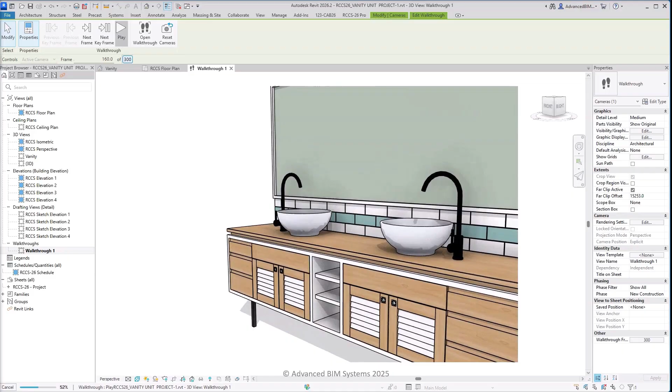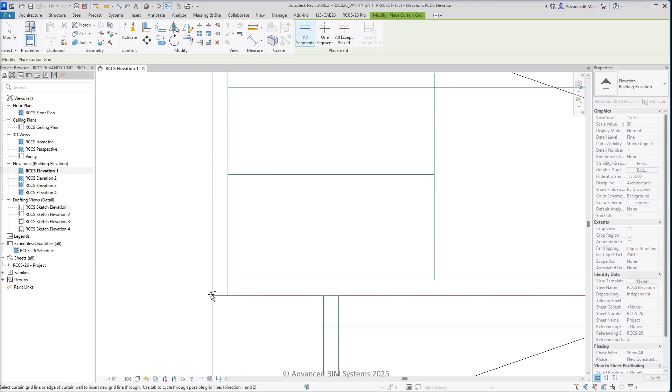To begin this vanity project, use the Split tool to horizontally split the RCCS host wall into 3 separate walls. Hide the middle host wall, which will later contain wall tiles. And then begin adding grids to the lower host wall. When adding grids, always add the longest, continuous, edge-to-edge grids first, followed by the smaller segmented grids that trim in between.

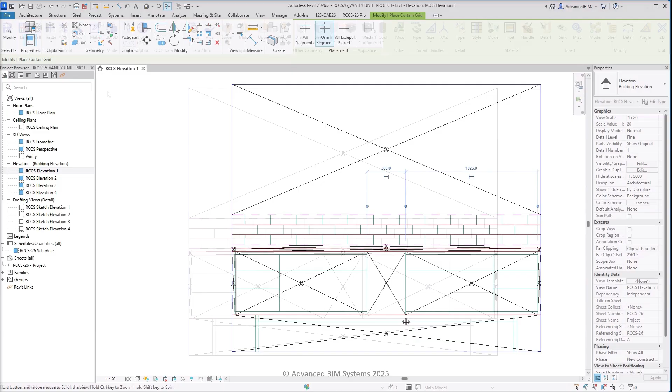It may be necessary at times to place a grid away from its 2D reference line, and then use the Align tool to correctly locate the grid. For grids that can host multiple grid segments, use the Add Remove Segments function to insert additional grid segments where required.

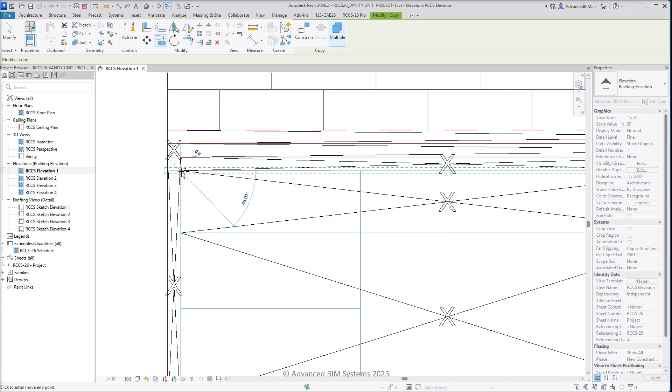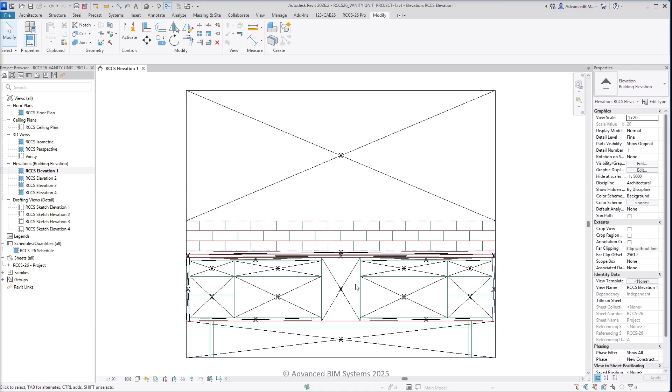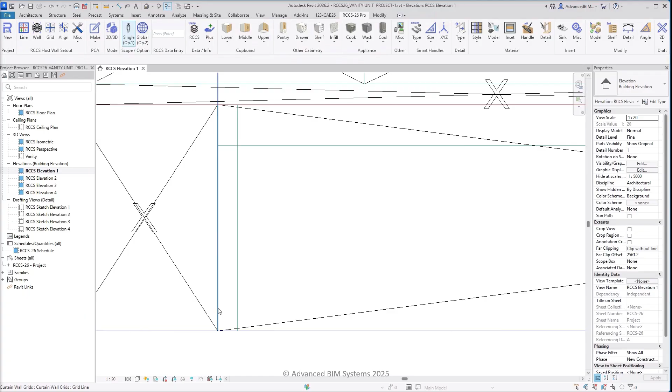It's always far easier and faster to copy grids that have the same grid segments, rather than starting each grid from scratch. The final grids in the lower host wall will determine the size and location of the legs and supports for this vanity unit.

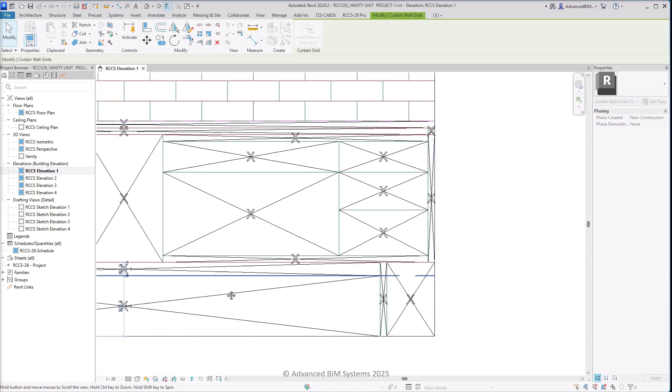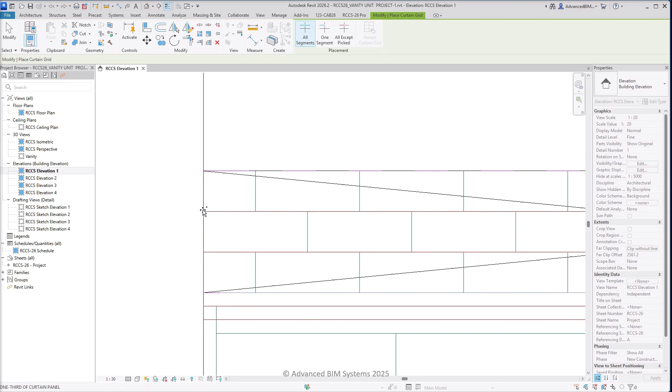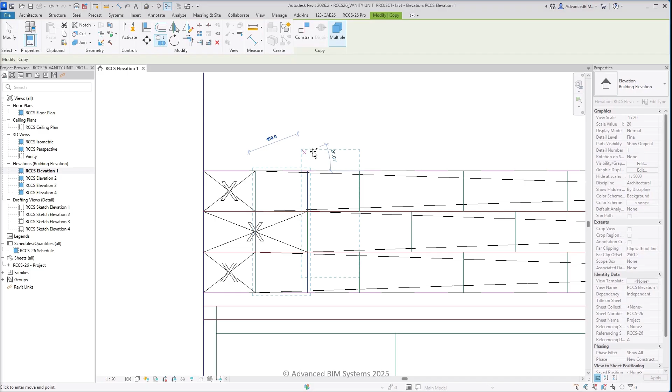Toggle the Reveal Hidden Elements mode, then unhide the middle host wall section to begin adding the wall tile grids. Hiding the upper and lower host walls makes it far easier to add the grids for the wall tiles. Once again, it's far easier to copy multiple grids across the design than it is to create each grid separately.

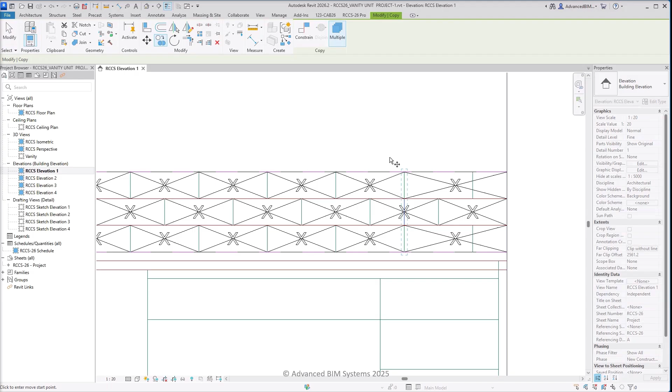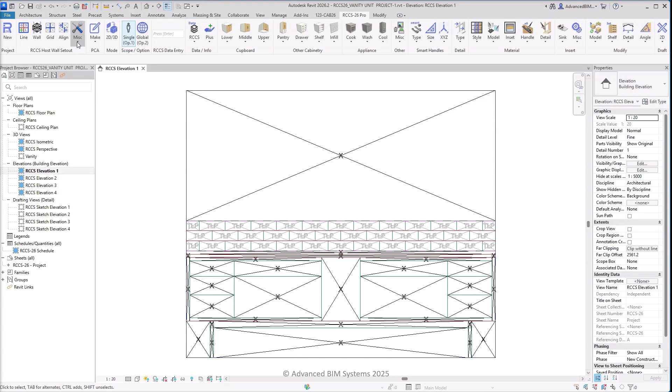To assign wall tiles, enter a tile thickness, then activate the Populate function, which will automatically assign tiles to all visible cells in this view. Now, unhide the upper and lower host walls to begin assigning the various cabinetry components to this design. Start by adding the various voids throughout the lower host wall. Enter a depth value. Then assign the infill panel components where required.

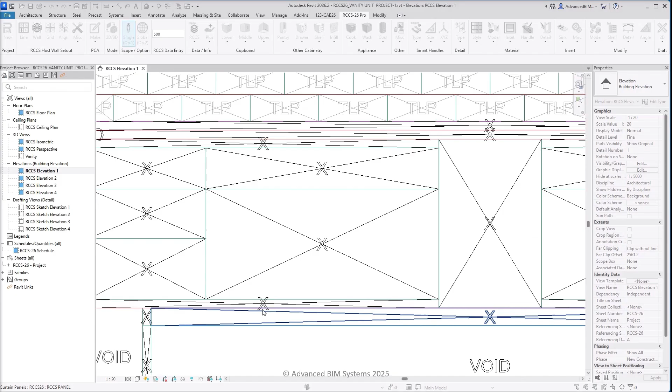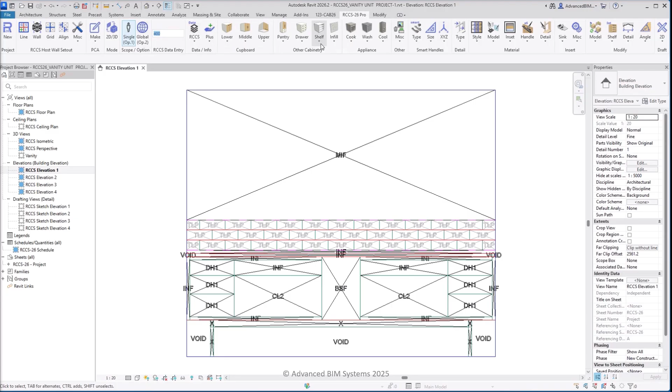Change the depth value, then activate the drawer function, and click on the required cells to assign drawer components. Assign the remaining components that have the same depth value. Then reset the depth value and assign the upper mirror. Use the single and double space frame component functions to create the vanity legs and support frame.

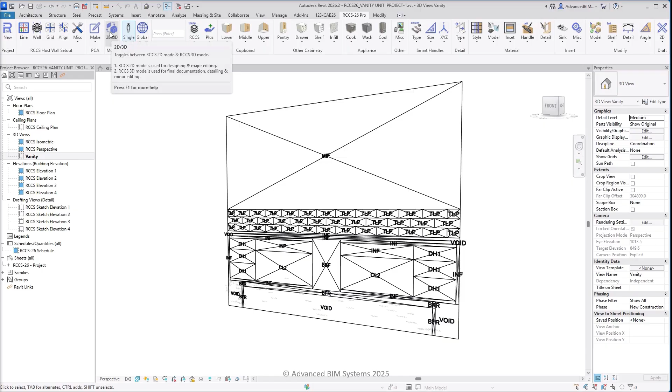To generate the vanity model, switch to a 3D view, then activate 3D mode by pressing the mode toggle button. The wood H material style will automatically change all relevant components to horizontal wood grain. Activate the Finish 1 model material and assign this material to the required components.

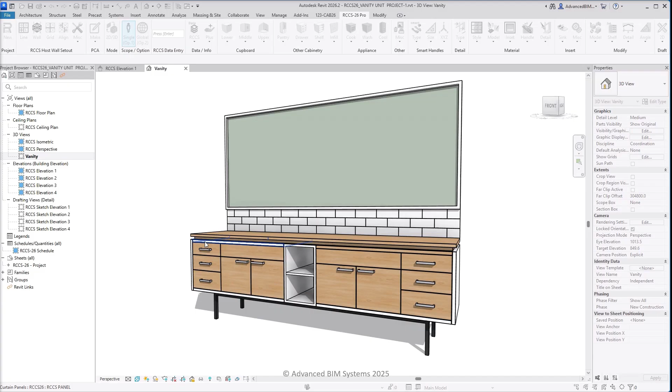Activate the Shelf Increase function, then click on the box Shelf component once to increase the shelf count by 1. Use the Base Offset function to increase the height of the bottom shelf while still maintaining equal spacing between the upper shelves. The Width function can be used to change the shelf frame width.

The Shelf Setback function offsets the front face of the inner shelves from the front face of the main component. Finally, adjust the inner shelf thickness using the Thickness function. Setting the outer edge radius to 0 will create a seamless transition between adjacent components. The next step is to assign HQ handles 1 and 2 to the drawers and cabinets as required.

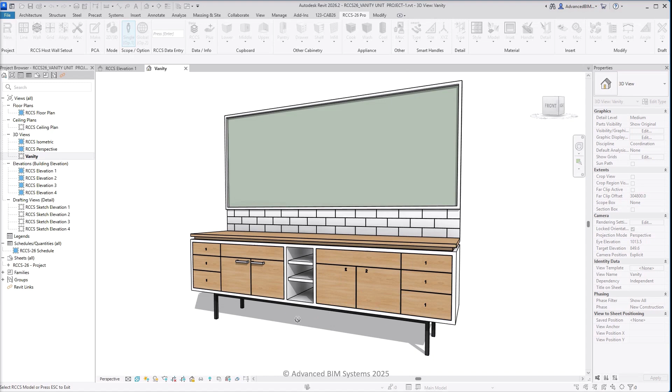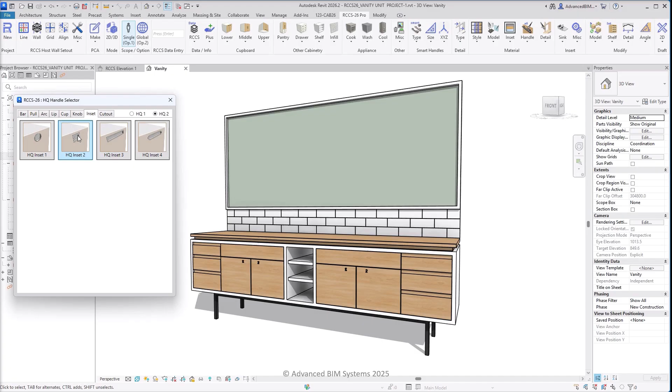Open the HQ Selector palette, select the Cutout tab, and choose a grooved cutout handle type from the menu. Set the drawer cutout handles to the top position, then use the Span function to create full-width grooved pull handles. Open the Inset menu, set the toggle to HQ2, then select an inset handle to apply to the cabinets. Use the White Handle Material function to change the inset handles to white.

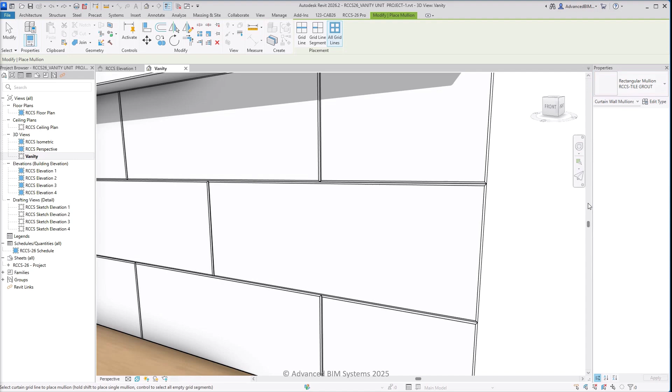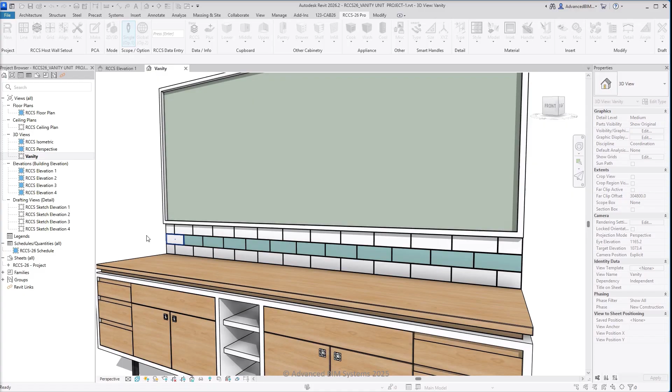For extra detail, use the Mullion function to add grout between all the wall tiles. The Tile 2 Model Material function can be used to change individual tile materials as required. Choose a basin type from the Sink drop-down menu, then place and orient 2 basins on the vanity countertop. Enter an inset frame width, then activate the Inset function, and select the 2 cabinet components to apply.

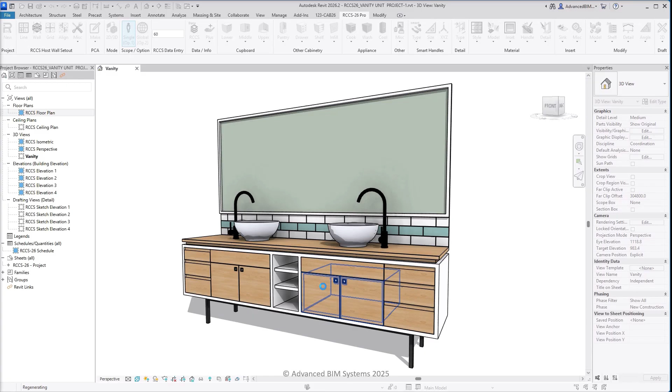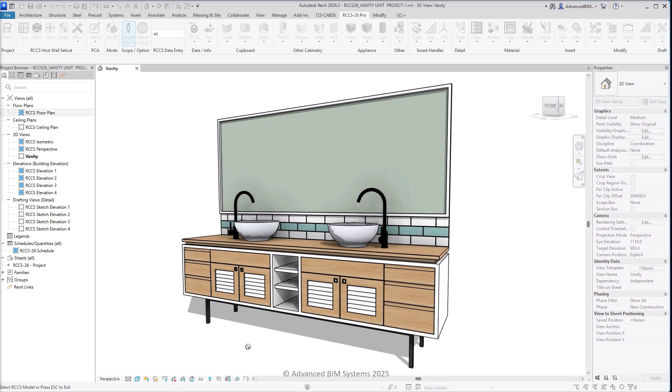Activate the Louver function, then enter a louver width value, and click on the cabinets to add louvers. The louvers material can be altered by applying either of the infill material functions. Use the Face Divider function to apply the final detailing to the cabinet faces. The Face Divider is a line-based tool that can be drawn between any 2 points or edges to divide a planar face.

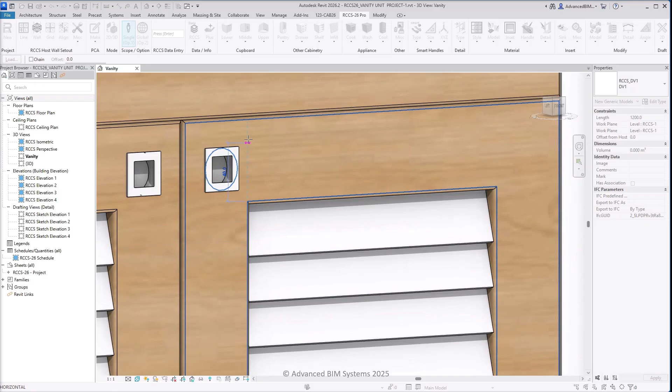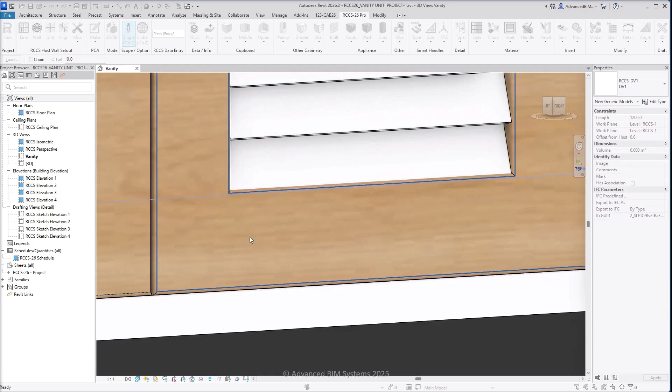Four face dividers are required to divide these cabinet faces into 4 separate segments, so that either vertical or horizontal wood materials can be applied. The face dividers automatically cut the cabinet faces after the divider function is exited. Finally, the vertical wood material can now be painted onto the front vertical faces of the cabinets to finish up this vanity design project.